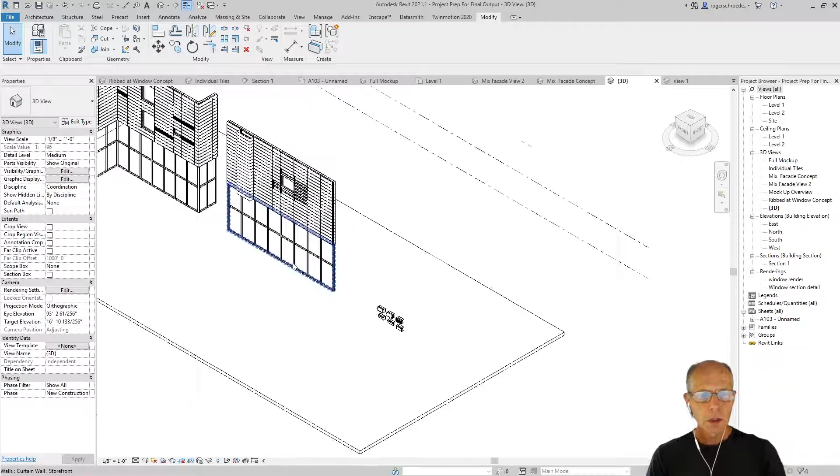I basically made a mock-up. I'll show you what it looks like in a 3D view, and I'll zoom out here. I've got two mock-ups.

One was to explore the idea of the window, to show the kind of details when you remove the componentry away from them. I did a little experiment with a bump out, just a tile that had a deep face to it. But that's not really critical to this project.

And the other facade was just for experimenting with some variations. You'll notice I started both facades above the podium level, in order to deal with the awkwardness of these kinds of systems coming down to grade without dealing with landscaping at grade level. So I started them at the second floor level as if we had a podium here.

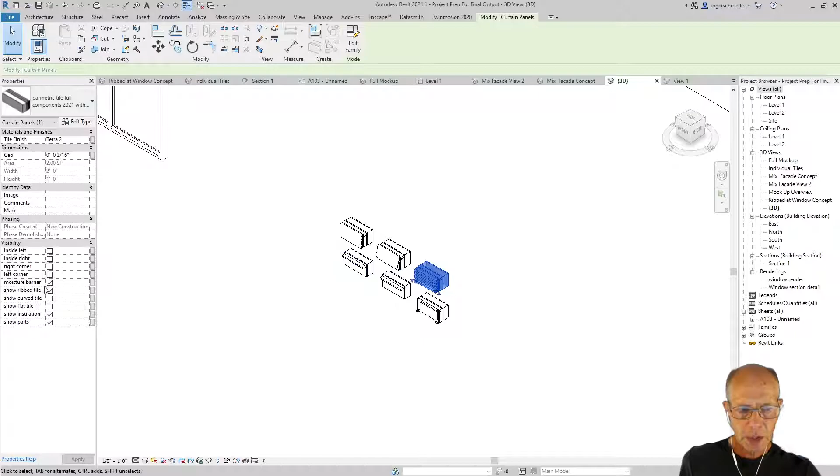Over here I have individual little tiny rain screen panels that I've separated off so they can contain one of the actual panels itself. It's a curtain wall panel system that's only 1 foot high by about 2 feet wide. And that allowed me to change the visualization of the tile.

For instance, in this one, if I click into the component, because I actually have the whole panel here, you'll notice I have the moisture barrier and the ribbed tile showing. I don't have the curved tile showing. I'm showing the parts and the insulation.

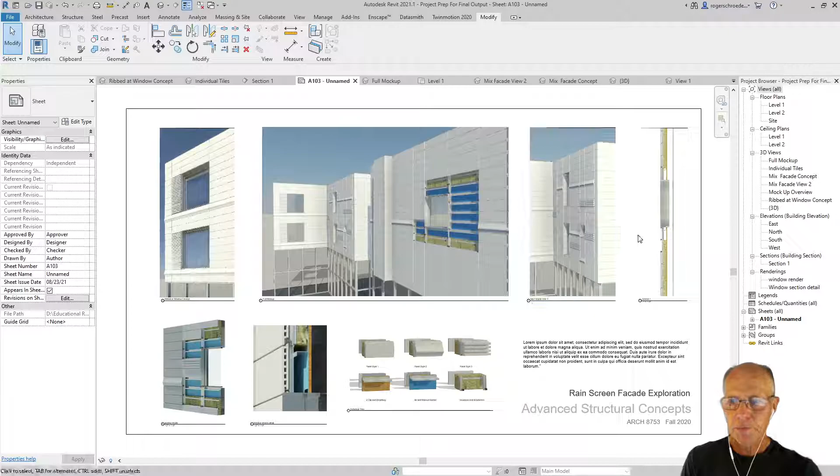So the idea is, in order to reveal different tile shapes or that, you just select which things you want visible here. That kind of takes care of the general arrangement of the way I made the layouts. We'll go back to this drawing sheet.

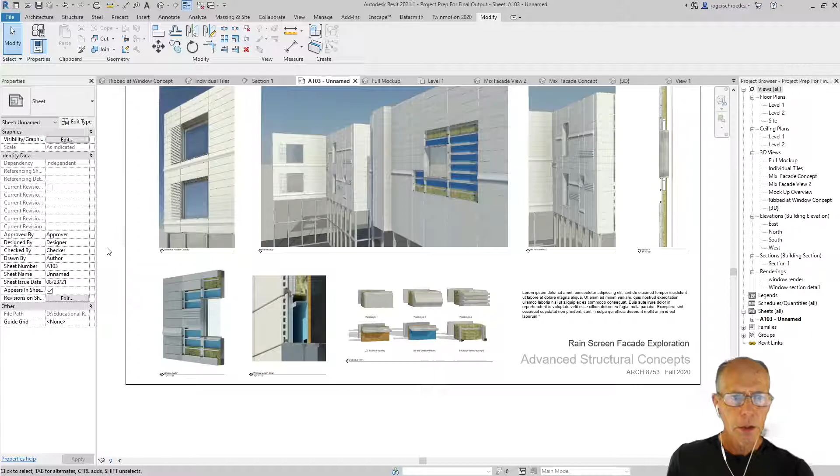So you can see these are details that are pulled from specifically this component of the mock-up. You saw where this was done, and then I've accentuated or pulled these up to be larger on the sheet so that you could get a feeling for the light and shadow of these two facade concepts. I've also included a section detail. I think this is one of the main reasons we worked through this project.

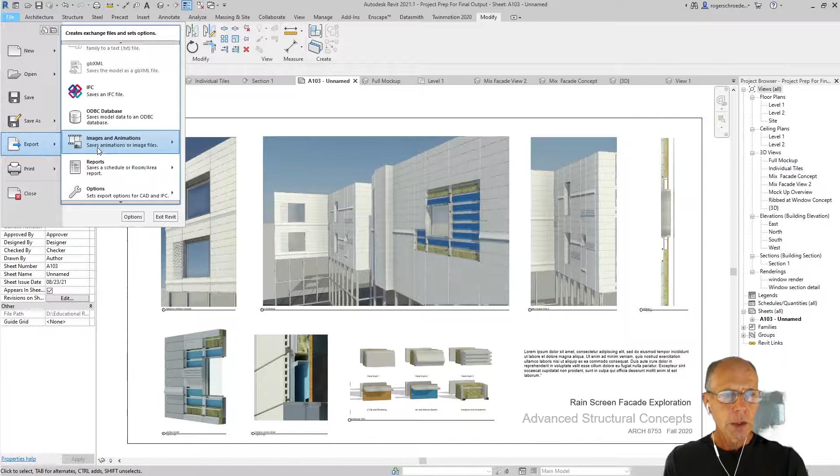So you can see the relationship with the tile, to the clip system, to the Z-girt. I don't have it in outline mode, it's really just illustrated so you can see the textures. You can decide to make these show up any way you feel comfortable or find interesting.

This is where you get the chance to be creative both in the layout and design of these facades. One thing I wanted to show you, since this is one of the first projects we're going through, is how we export this sheet for submittal to the blogs.

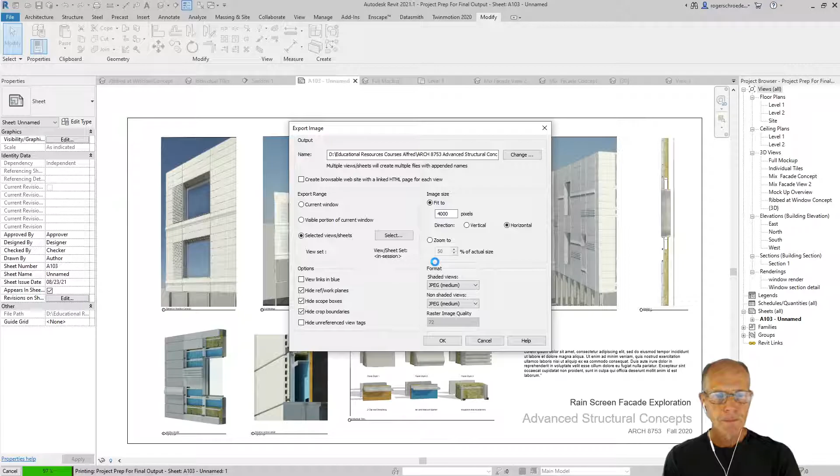So I'll go to File, then Export, and roll down here until we get to Images, and we'll go to Image. When this dialog box shows up, you'll see that I can select the sheets. I've got this already selected for the sheet that I've created. And I want you to make sure that when you output it as a JPEG, it's at least 4,000 pixels wide. That'll give us enough resolution that I can clearly read all of this. I'll just click OK on this.

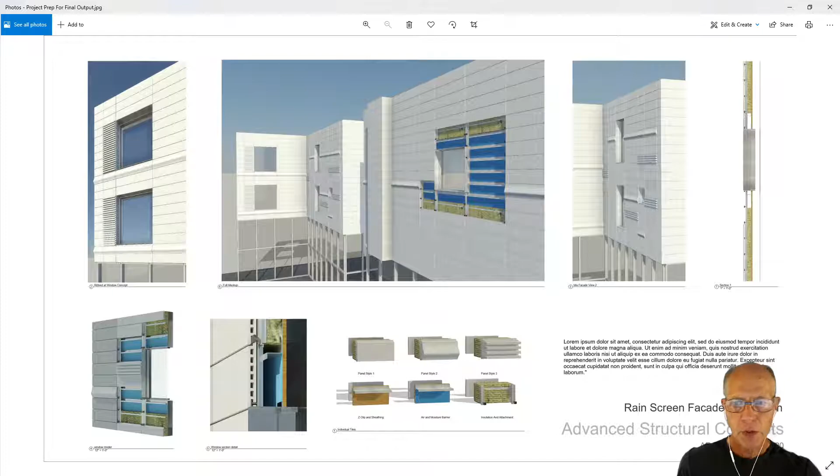It's going to ask me to replace it because I've already done this once before, and I'll go yes. Then we'll go ahead and open it so you can see what it looks like, which I recommend doing so you know if it failed. I don't know what's happening, maybe a memory problem this time. I'm not going to bother doing it again because this is already the same image. I hope you don't have that same issue. Let me just open up that specific project file.

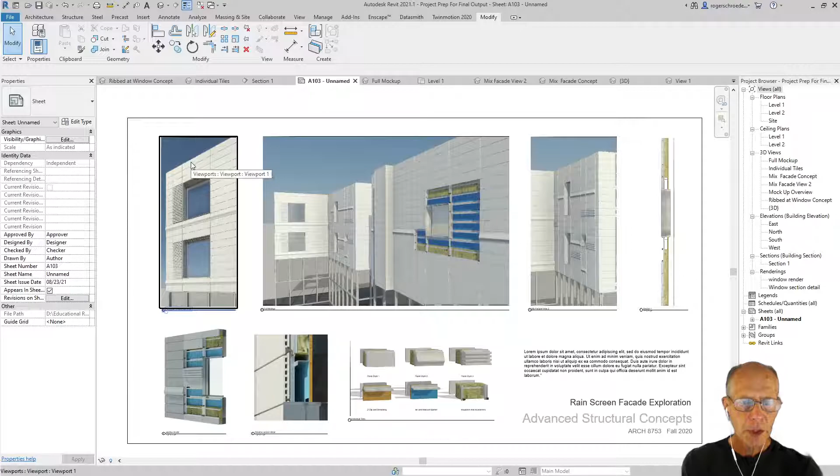Okay, so this is what it looks like when it's exported as a 4,000 pixel wide image. And you'll notice that if I zoom in here a little bit, we have pretty good resolution, so it's easy to read. I can read what you've written, look at the quality of the facades you've created. So this is what I'm expecting as far as the quality of the document, the JPEG file that's submitted. The nice thing is it's a very small, lightweight file, only in the 400 to 600K range, so it's easy to put into another type of presentation.

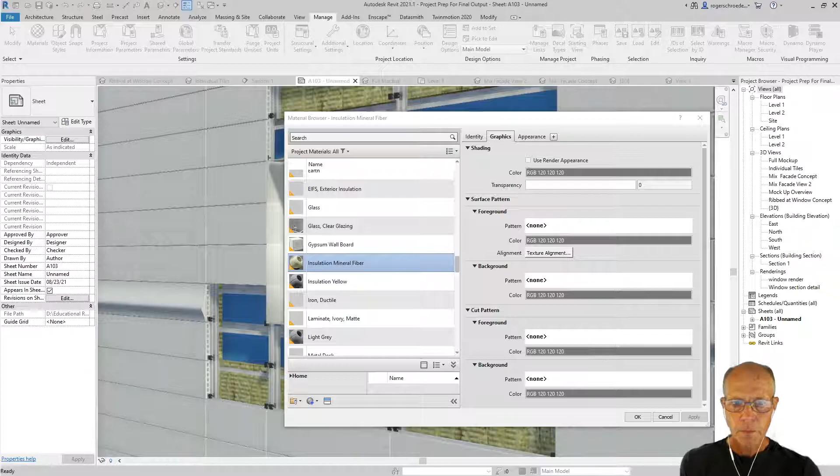Okay, so you might have some questions about some of the ways that I created these divisions between the panels. So let me cover a couple of things. One of the big things is that I have textures on all of this now, especially if we roll in here. You'll notice that the insulation has a texture to it. These have an aluminum texture, which I really don't like a lot, but I haven't had time to fiddle with that. But all of those textures are managed.

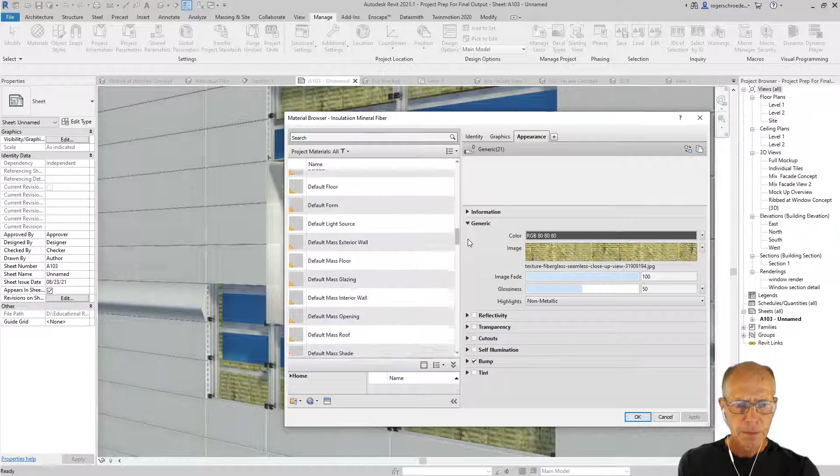So if I go to the Manage tab and go to the Materials palette, for instance, if I click on Insulation Mineral Fiber and go to Appearance... my mouse clicked over to the other screen. This is linked to a specific texture. I'm going to include the three textures: the aluminum texture, the blue board texture, and the tile texture.

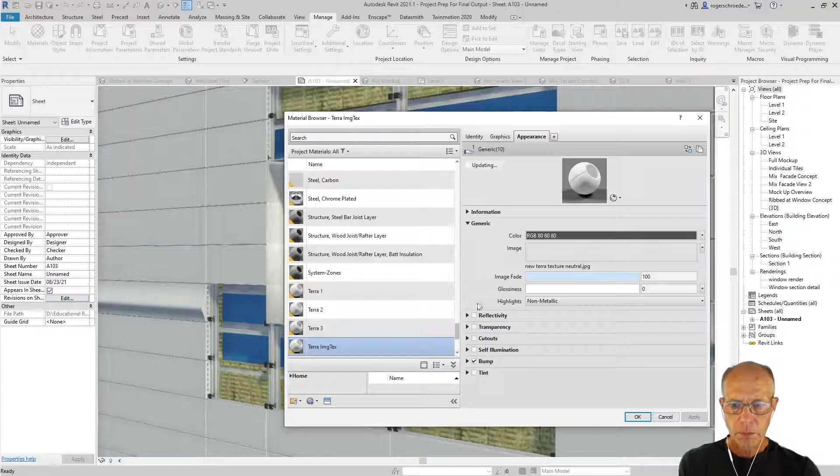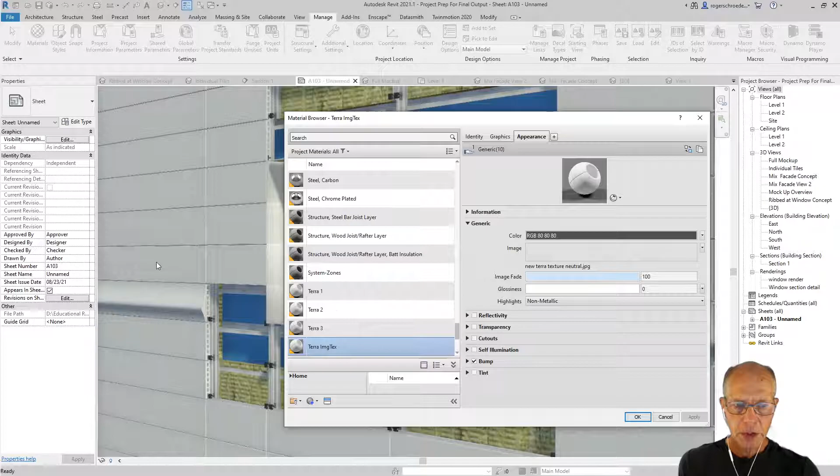The tile texture that I have, I've applied to... let me see where those are listed. I had some names for the tiles. Excuse me while I scan through this. They're not showing up here. Oh yeah, there it is, Terra 1, 2, and 3. They're all using the same texture image that I'll provide.

And then the way to really make them work, I can make them fade or give them different levels of illumination in order to create some variations in the pattern. Because with terracotta, they don't always fire through the kilns and have the same appearance. It's not important that you make those variations—I didn't in this last one that I ran—but I do want you to import some sort of texture and then apply it to all the tiles.

So the base unit, or base tile, that I supplied you had these linked to this texture, and I'm going to supply that on Blackboard in the project file. That will cure the issue of everything looking gray.

I guess one of the other things I probably need to cover with you is this idea of the dividers and some of the graphic issues that come along with that. When they say the dividers, I mean the grid lines of the rain screen panel system.

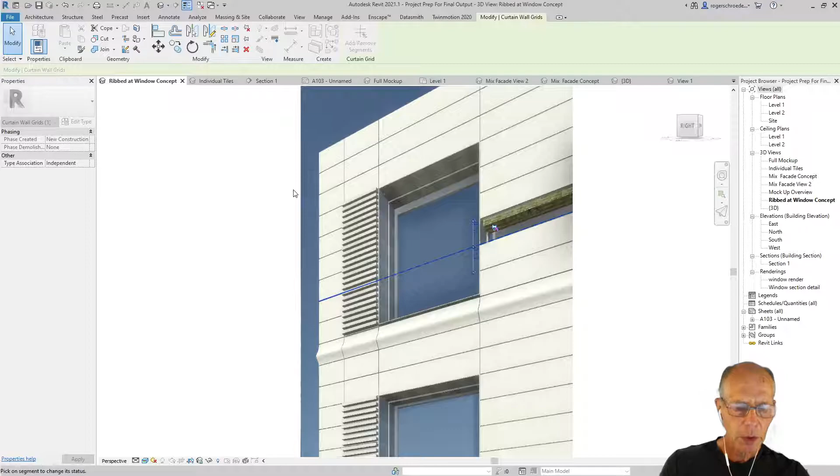So if I wanted to change this, you might be wondering - I have a 5-foot wide window panel and a 2-foot wide rib panel here. I've got this unpinned now. Yours would be pinned if it was the first time you selected it. You'll notice I just clicked it pinned and it took it to the default 5-foot size. So I'm going to unpin this again and take it back to 2 foot.

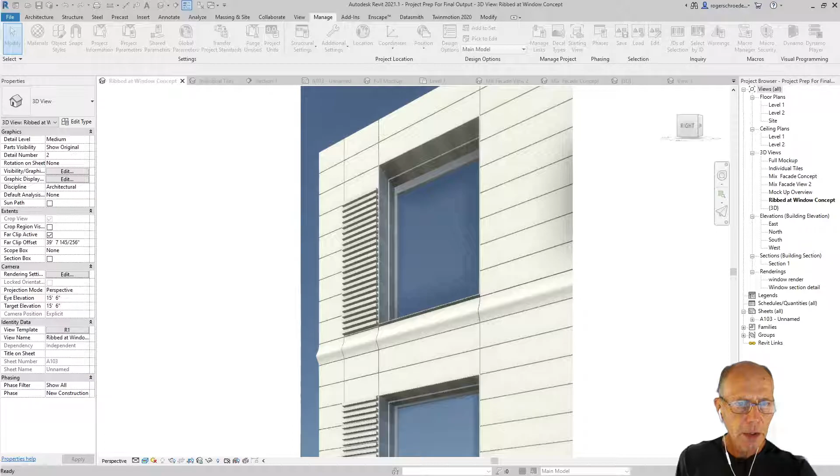All right, so that's how we make that variation. One of the things I've also found is that if you delete a grid line, this will start to render incorrectly sometimes. It's actually just a rendering issue. The panel is still there, or in this case, the panel hasn't extended up, so it doesn't quite look proper. This is really, I should be just demonstrating this more with the window.

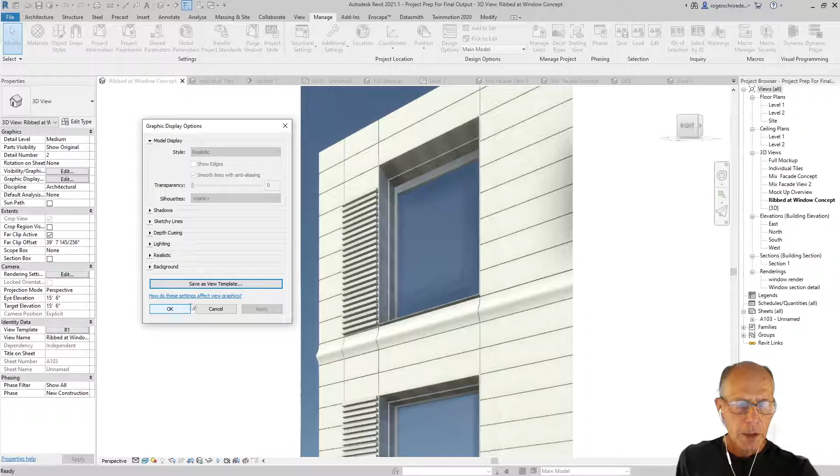Let me back off of this for a second, and let's delete this one here. I'm going to unpin that one, and I'm going to remove this segment. And the window extended up fine this time. But if it didn't look proper when you did that, if it showed just a hollow missing panel, many times it's just a rendering issue. The way to correct that is just to re-render the scene, or you can look in another view, and many times that view will be correct. Don't become alarmed that the system is kind of messing up, so to speak.

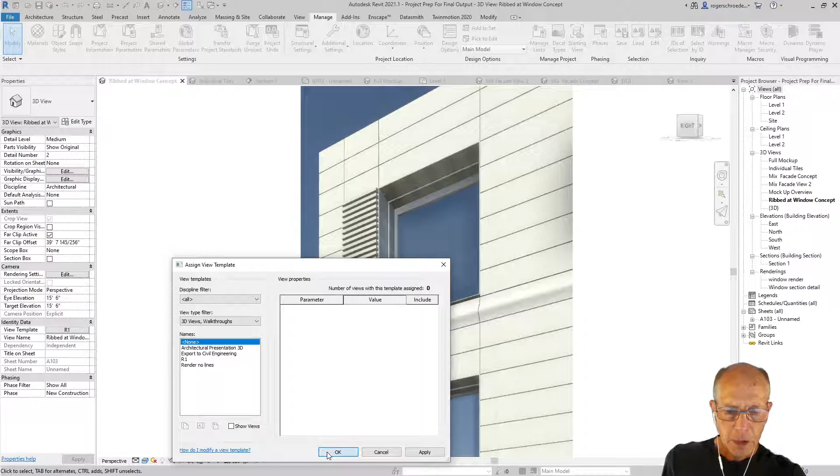But what I've done is I've established some rendering templates, just in case you're not familiar with that. Once I've rendered in a scene, I can save that view as a template. In this case, I've saved it as - oops, I don't have the screen popping up for you. Hold on just a second. I'll bring this over to this screen. I've just opened up the graphic. Let me just cancel out of this and do it again.

Graphic display options, and save as a template. That's where I labeled this as R1 view template. You may already know how to do that - I hope you do. And that'll always bring you back to re-render the scene exactly as it was.

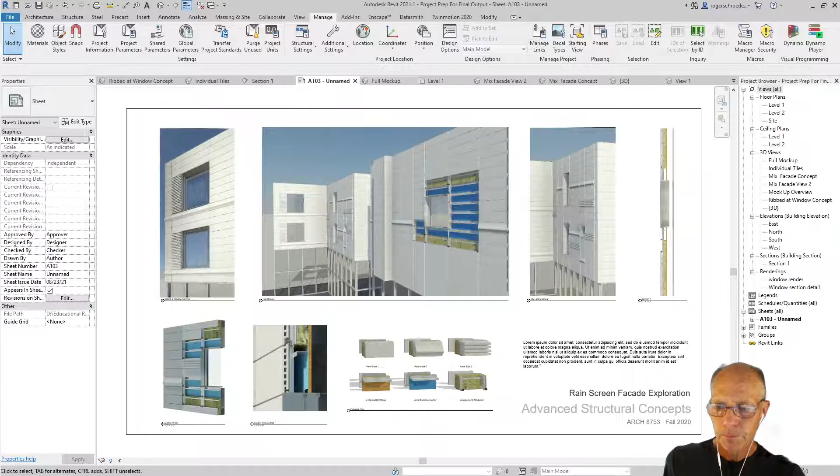I'm going to go ahead and undo this so that I don't leave this one tile here offset or incorrect. Now, one of the things that is important to remember about the view template is that if you need to change the rendering for whatever reason, you can't change it once you've established a view template. So you have to go back to none, and then you'll have flexibility to be able to modify whatever the rendering settings you have for that.

So I don't know if I've caught everything that you're going to need for completing this project. Do Zoom ZE to get us back to full screen.